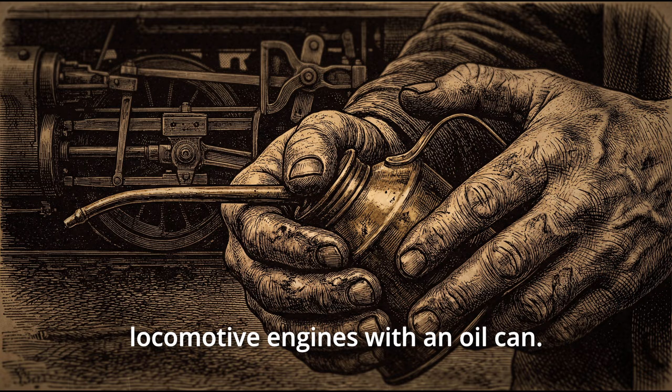In 1872, a black engineer named Elijah McCoy held a patent that would change the world. His education? Edinburgh University. His credentials? Mechanical engineering degree. His job? Shoveling coal and crawling around locomotive engines with an oil can. Because in 1870s America, even a formal engineering education couldn't overcome the color of your skin.

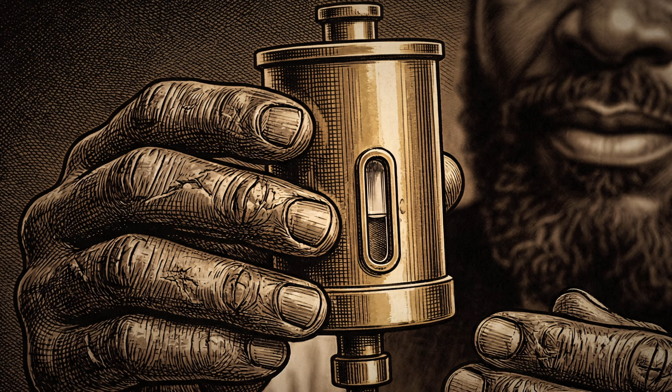But McCoy had an idea. What if he could invent something so brilliant that the entire railroad industry would demand his name? This is the story of how an outcast engineer invented the machine that made trains unstoppable and turned his name into a phrase we still use today.

Let's talk about who Elijah McCoy really was. Born in 1844 to parents who escaped slavery through the Underground Railroad, but his father did well in Canada, well enough to send young Elijah to Edinburgh University to study mechanical engineering. For 5 years, he immersed himself in thermodynamics, material science, precision mechanics, the cutting edge of Victorian engineering.

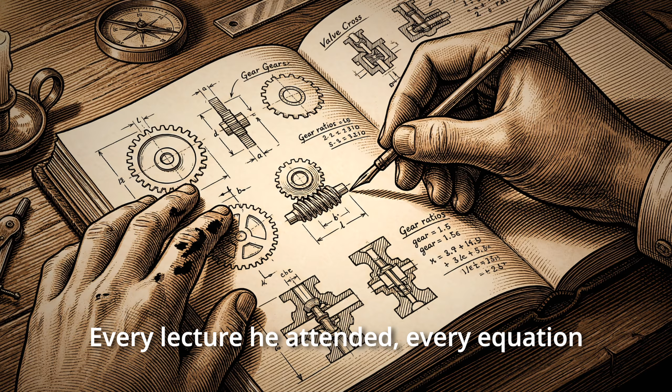He understood what his parents had risked. Every lecture he attended, every equation he mastered, was built on their sacrifice. In 1866, he returned, a trained engineer, ready to build the future. But America in the 1860s had other plans. Door after door closed. Firm after firm rejected him, not for lack of skill, but for the color of his skin. The only job he could find? Fireman and oilman for the Michigan Central Railroad.

Think about that for a second. You've spent 5 years studying engineering in Scotland. You understand thermodynamics, mechanical systems, material science, and your job: shovel coal and crawl around a moving locomotive with an oil can, because every few miles, these steam engines had to stop, completely stop, so someone, usually McCoy, could manually oil every cylinder, every valve, every moving part.

It was dangerous. It was exhausting. It was a waste of time. But most of all, for a man with an engineering degree, it was humiliating. So let's talk about the problem McCoy was trying to solve. In the 1870s, railroads were the lifeblood of America. Every train, passenger, freight, industrial, ran on steam power. And steam power meant friction, lots of it.

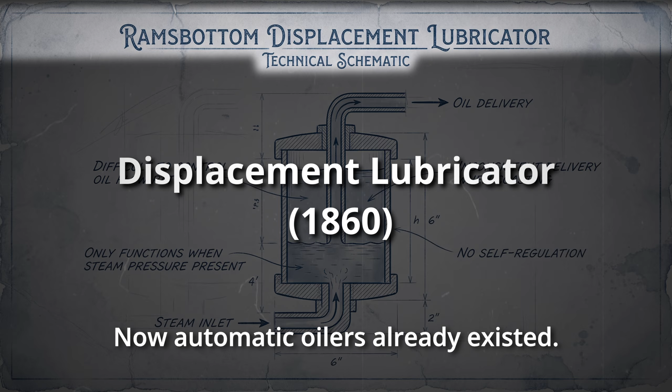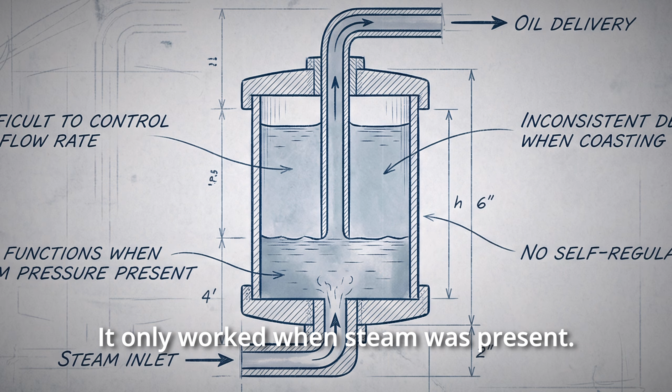Now, automatic oilers already existed. The displacement lubricator, patented in 1860, used steam pressure to displace oil out of a reservoir. But it had problems. The oil flow was hard to control. It only worked when steam was present. When the engine was coasting, lubrication stopped, and the delivery was wildly inconsistent. Railroads used them, but they weren't satisfied. The system was better than manual oiling, but barely.

McCoy tested version after version. Different valve designs, different reservoir shapes, different pressure mechanisms. His workshop floor became a graveyard of failed attempts. For 2 years, he kept failing. Month after month, prototype after prototype, each one almost right, but not quite. Until one night, everything changed.

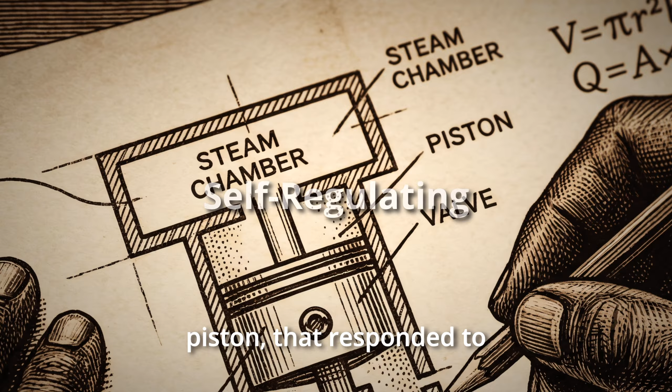And then he saw it. The problem wasn't the reservoir. It wasn't the pressure. It was the control. What if instead of just letting steam displace the oil, you used a valve, controlled by a piston, that responded to the steam pressure itself? The engine would regulate its own lubrication. More steam pressure, more oil. Less pressure, less oil. Perfectly matched to the engine's work.

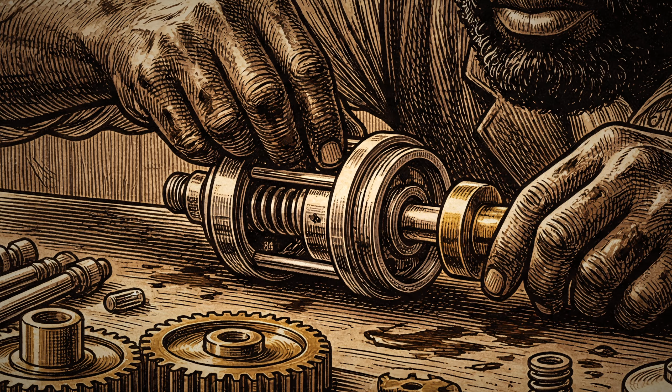It was brilliant, elegant, automatic. After 2 years of failure, he'd found it, the solution that would change everything. His hands moved with new certainty, each component machined to perfection, each connection precisely calculated. And when he held the finished device up to the light, he knew this would work.

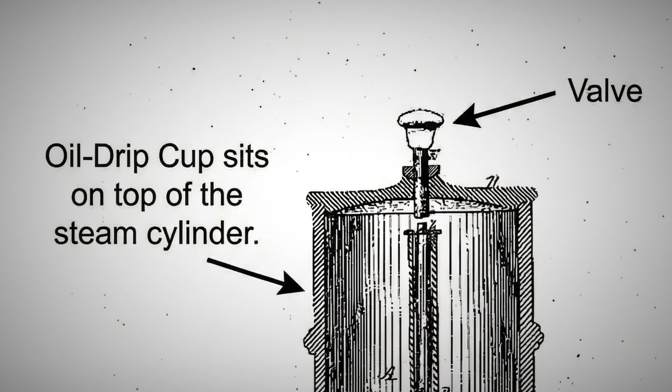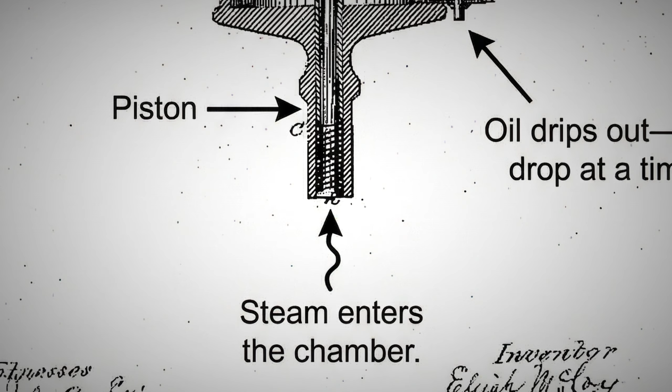Here's how McCoy's genius worked. The oil drip cup sits on top of the steam cylinder. Inside, a hollow stem runs down into the steam chamber. At the bottom of that stem, a piston. At the top, a valve. When steam enters the chamber, it pushes against the piston. The piston moves the valve. The valve opens, oil drips out, one drop at a time, exactly where it's needed.

But would it actually work? McCoy convinced Michigan Central to let him test it. And when that first drop fell, perfectly timed, perfectly controlled, everything changed. More steam, more pressure. More pressure, more oil.

The system regulates itself. And here's the genius move. The oil flow is controlled. Not a flood, not a trickle, a steady, precise drip that you could watch through a sight glass. The test locomotive ran for 75 miles without stopping. Unheard of. Railroad men who had dismissed McCoy hours earlier now crowded around his invention, demanding to know how soon they could order them. It was simple, reliable, and it worked.

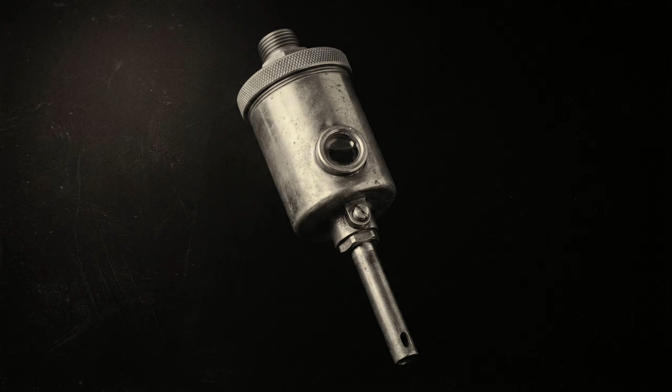In 1872, Elijah McCoy received U.S. Patent 129843 for his improvement in lubricators for steam engines. July 23rd, 1872. His name officially recognized. His genius legally documented. But like many black inventors of his era, he lacked the capital to manufacture it himself. So he sold the patent rights to investors in Ypsilanti. And that's when something unexpected happened.

So why did this matter so much? Because in 1872, America was in the middle of the railroad boom. 40,000 miles of track, thousands of locomotives, all of them stopping every few miles to be hand-oiled. Every day, rails stretched further west. Every week, new lines opened. The country was being stitched together by steel and steam. And every single one of those trains needed constant lubrication.

McCoy's device changed the equation completely. Railroad companies started ordering them. First, Michigan Central, where McCoy had worked, then others, because the math was simple. Automatic lubrication meant longer runs, faster trains, lower labor costs, higher profits. The Pennsylvania Railroad, the New York Central, orders flooded in. Trains that once stopped every 30 miles could now run for hundreds of miles without pause.

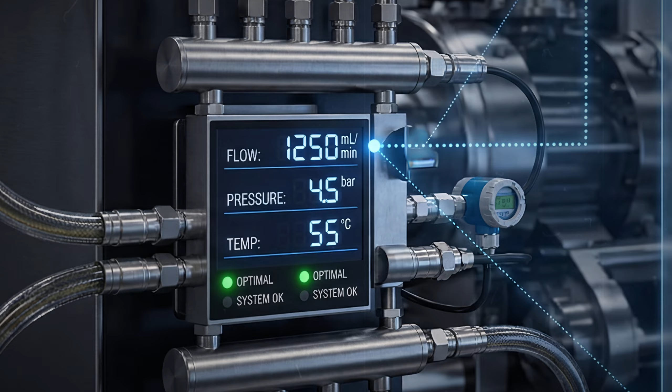So let's talk about why this matters to you. Every automated system in the modern world, every machine that regulates itself without human intervention, traces back to this idea. McCoy lived to see the beginning of this revolution. By 1900, his lubricators were everywhere. The hands that once shoveled coal had reshaped American industry. Today, industrial plants have thousands of lubrication points, all automated, all self-regulating, extending machinery life, increasing reliability, reducing waste. But McCoy's invention wasn't just about oil. It was about a bigger idea, machines that could control themselves.

McCoy spent the rest of his life improving his system. By the time he died in 1929, he held more than 50 patents. In 1920, near the end of his career, he finally founded his own company, the Elijah J. McCoy Manufacturing Company. At 76, he walked into his own office, his name on the door, the engineer he'd trained to be 60 years earlier. Lubrication systems, ironing boards, lawn sprinklers, rubber heels, vehicle wheels, scaffold supports. His mind never stopped inventing. In his final years, he could look back and see what he'd built, not just machines, a legacy.

In 2012, the United States Patent and Trademark Office named its first regional office after him, the Elijah J. McCoy Midwest Regional Patent Office, in Detroit, the city where he spent most of his life. Engineers, historians, and children gathered to honor him. The recognition came 83 years late, but it came.

But here's the real legacy. Every time your car's cruise control adjusts your speed, every time your thermostat regulates your home's temperature, every time a machine makes a decision without you, from complete factory automation to life support systems in space, self-regulating technology everywhere you look, you're experiencing the echo of what Elijah McCoy invented in a cramped workshop in 1872.